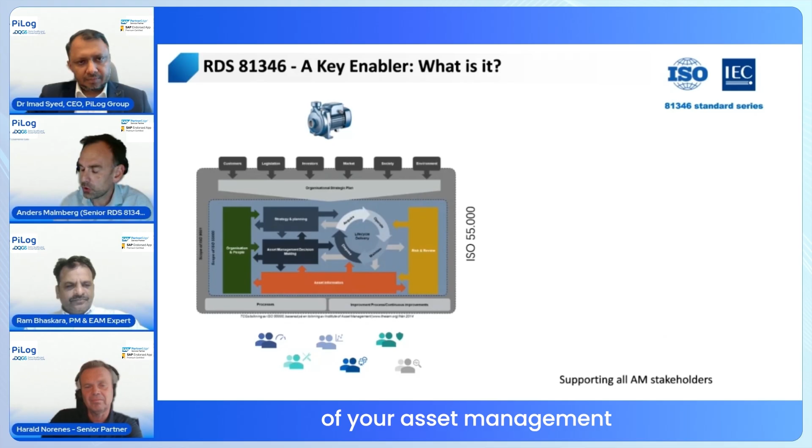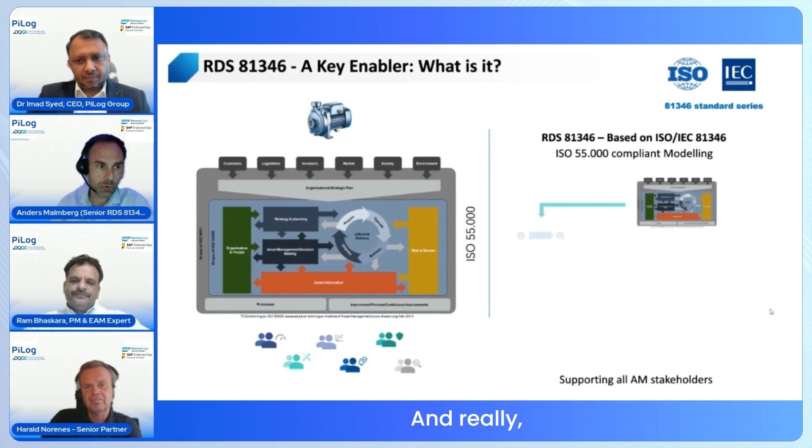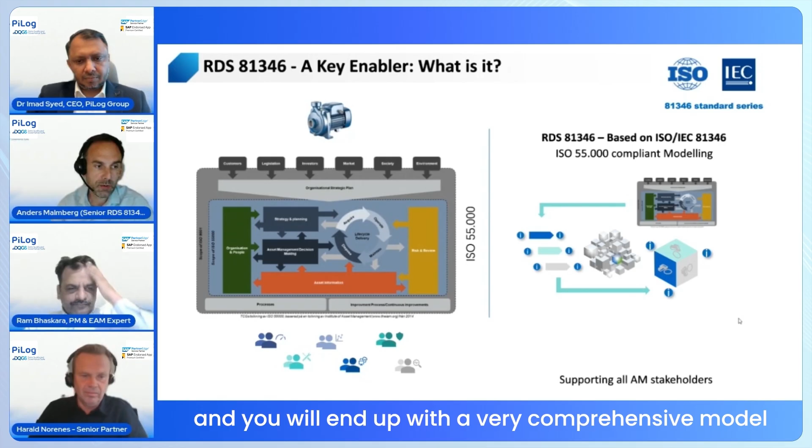So the way it works is you will need to understand the stakeholders of your asset management and provide to them the right kind of organization of your data and information so that they can use it. Really, who are they? What do they want? What do they need? Well, you simply model your asset information according to those stakeholders and their needs, and you will end up with a very comprehensive model that actually caters to all needs for all asset management stakeholders.

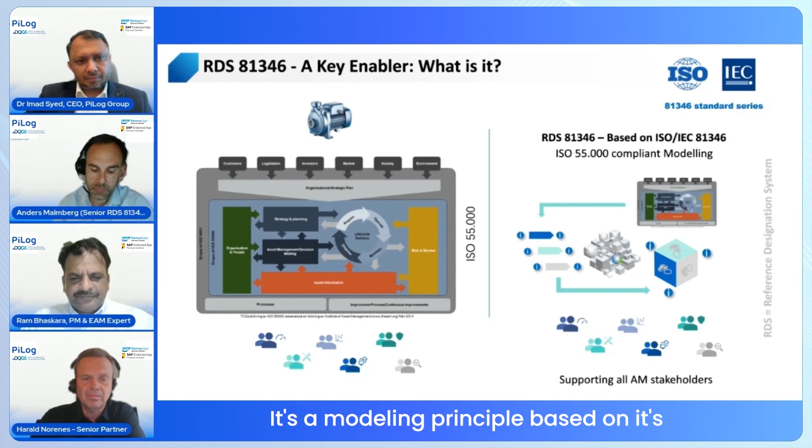So the ISO 81346 series standard explains how to build modeling, and the name of that modeling is RDS. Thus, RDS 81346. It's a modeling principle based on this international standard series.

So if you can also give a little bit of background on how far this has been developed, and is it ready to be adopted and used?

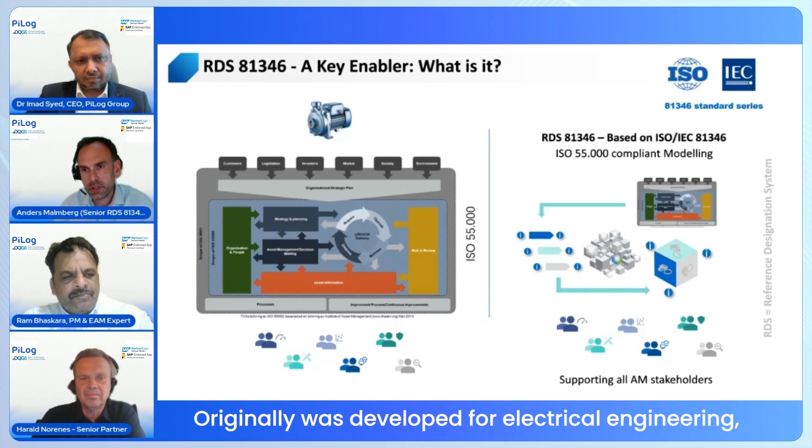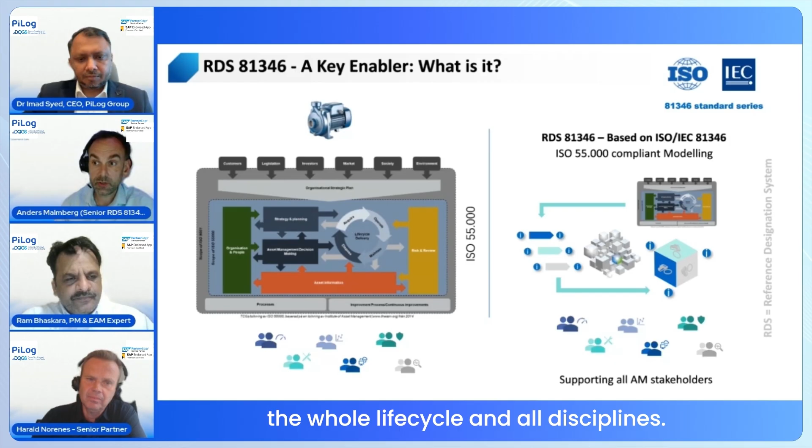Sure. So it dates back to the 70s. Originally it was developed for electrical engineering and has been used since then. But then for the last two decades or a bit more, it's been adopted to other industries, or other disciplines rather. It's one of the most well maintained and developed standards that I know of. Very, very active maintenance teams work to cater to all the needs and develop the standard in a way that makes it more useful. So now it supports all assets, the whole life cycle, and all disciplines. It's very, very powerful.

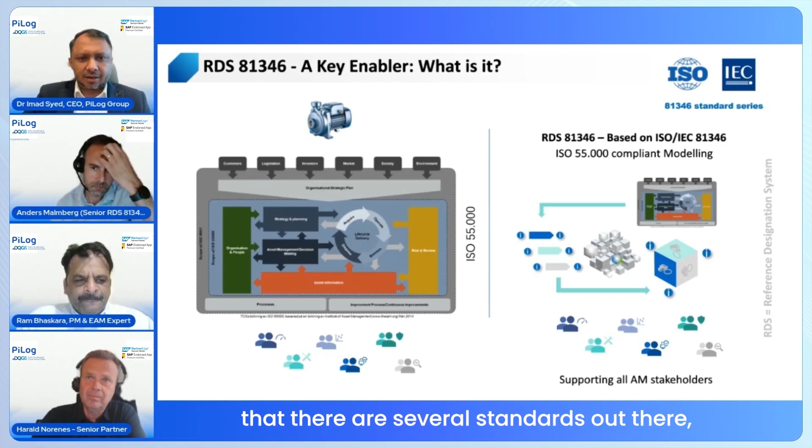Okay, that's good to know. And if I may also ask, there are several standards out there that are relevant to asset management. What is the differentiator here? What are the key enablers, as well as what are those values? If you can kindly deep dive into that.

Yeah, so while, for instance, ISO 14224, which is well known within the SAP PM kind of scenarios and ECC scenarios and so on, is actually developed for maintenance, for managing maintenance, this 81346 series, on the other hand, is developed from the start to actually cater to managing information, right? So the context for this information management and organization is not really specific, for instance, to maintenance.

Rather, it's specific to asset information throughout the life cycle, thus all asset management practices. And really, the difference, for instance, between 14224 and 81346 would be that 81346 is more asset management process agnostic, leaving you with broader support. So when you want to implement, for instance, asset performance management and those kinds of value streams, you need something that is a bit broader and that can cover more perspectives at once.

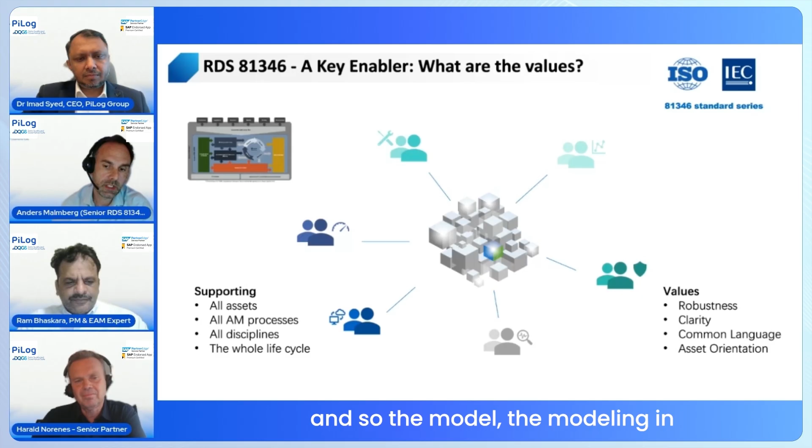And so the modeling in 81346 is based on allowing a variety of stakeholders to see their assets from their side, from their perspective. So it makes the standard very relevant to a lot of stakeholders, and that's really one of the values, also the versatility. It gives you this common language where you can use this same standard for all disciplines, all assets, the whole life cycle, and really cover all the asset management processes. So in that sense, it's quite unique, actually, but also very robust.

Thanks, Anders. Because this is just the introduction of it. Probably at a higher level, what you explained is good enough now. But once we deep dive into it, and once we start understanding the different models and different aspects of it, probably we'll go further.

Anders, you have been an RDS 81346 practitioner. Harald also has been a practitioner of RDS 81346. But we also have Ram, who has been a practitioner of 14224. So if I may ask, both of you, how does the modeling of RDS 81346 differ from 14224? Anders, maybe you can go on to the modeling of it, and then we'll ask Ram the same question.

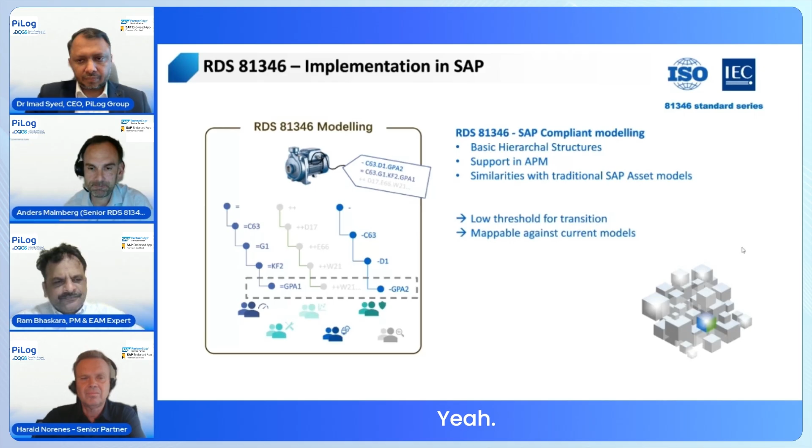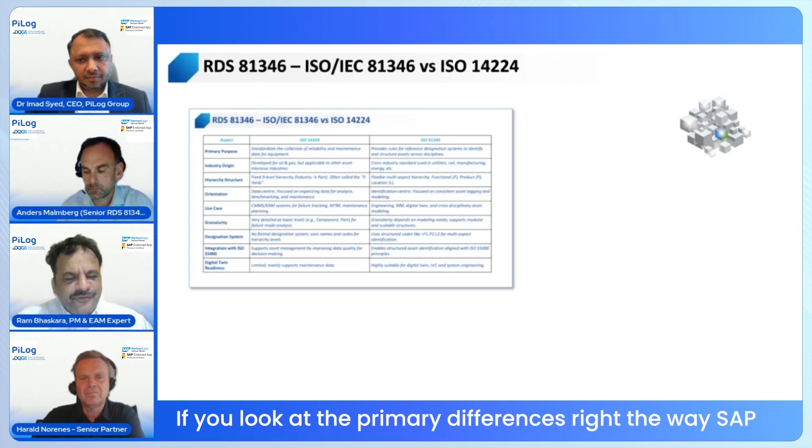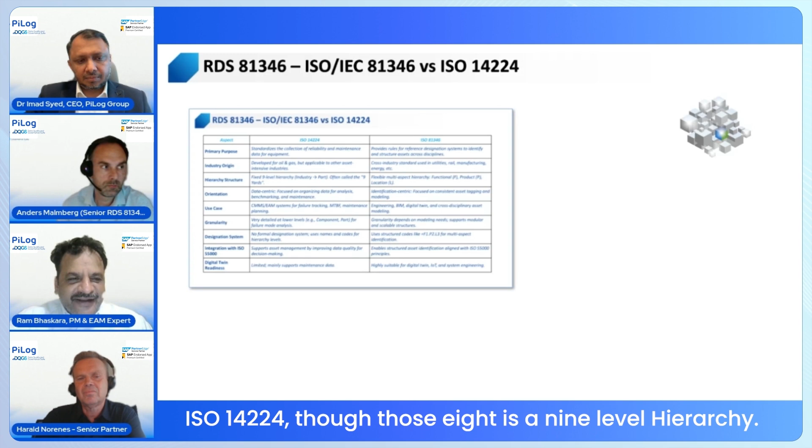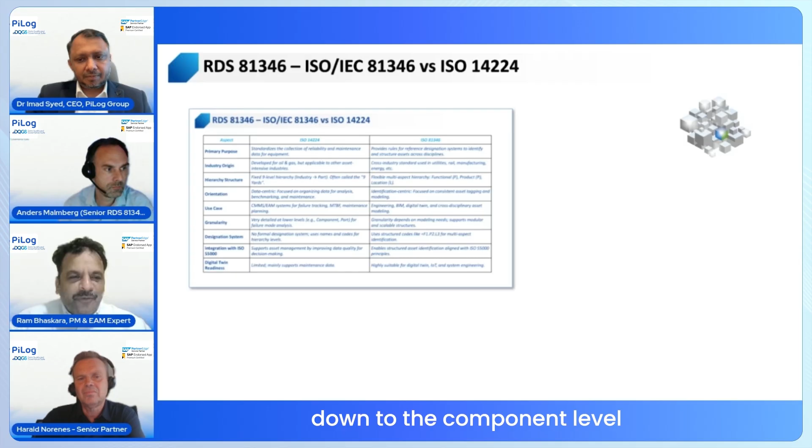Absolutely. So thanks, Anders, for the briefing on 81346. If you look at the primary differences, the way SAP or any institution implementing an EAM solution looks at ISO 14224, though it is a 9-level hierarchy, they start at the equipment level and then try to build all the series or all the data elements below that. If you're looking at assembly, subassembly, and try to break it down to the component level, they focus on the assembly, subassembly, the components, and go down.

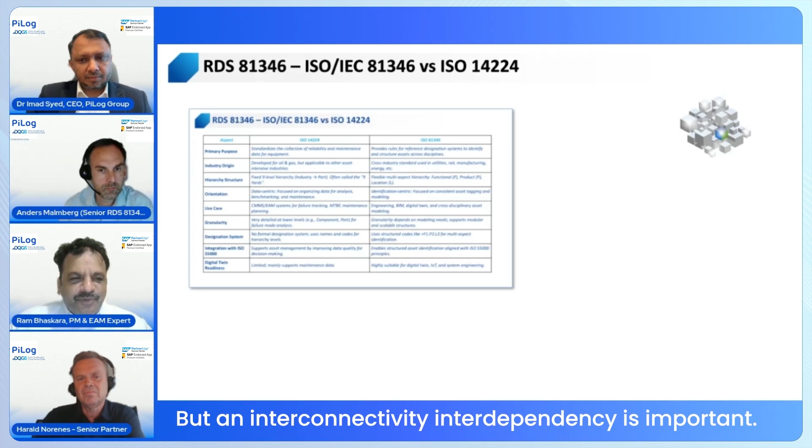But the broader picture, which is typically left out in an EAM solution, is required predominantly when you look at asset performance, because asset performance is a much broader concept, wherein interconnectivity and interdependency are important. So the product, function, and location aspects, which RDS brings in as an additional flavor, become very centric to doing the performance of an asset in terms of its operability, in terms of its function, rather than just a product. That is the flavor which RDS brings in.

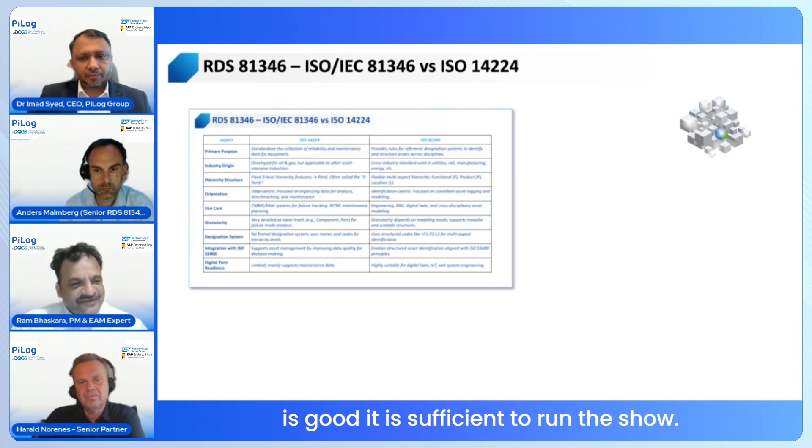And that's why the coexistence of both standards works - one fitting the requirements of work order management and scheduling in EAM, for say an S4 HANA or ECC perspective, is good and sufficient to run the show. But having said that, when you go to APM, when you try to do advanced reengineering processes, or look at the effectiveness of an asset, reliability of an asset, and the longevity of an asset, 81346 gives a broader picture.

So this is a foundation to start with. We can have detailed discussions at probably later sessions. Thanks.

There's a very interesting question from Ejemezu. Is ISO 81346 a replacement for 14224 since the former covers a broader scope? Anders, you can answer that.

So yeah, no, it's absolutely not a replacement, and there are many things in 14224 that are not covered in 81346. For instance, maintenance practices and maintenance strategies and so on. So that's absolutely not covered in 81346. Let me be very clear on that.

Also, 81346 sure has a broader scope, but it's also mainly a different scope. So they're very complementary, but not replacing one another. So the bottom line is both need to coexist. One is from a plant maintenance perspective, equipment efficiency perspective. The other one is from the asset performance management perspective, right?

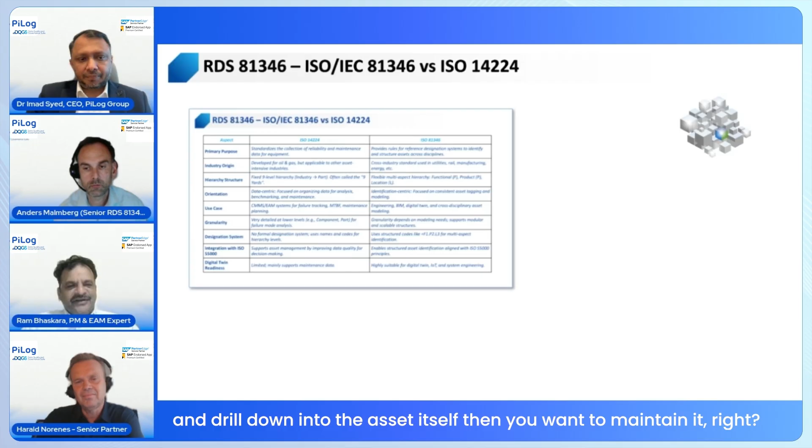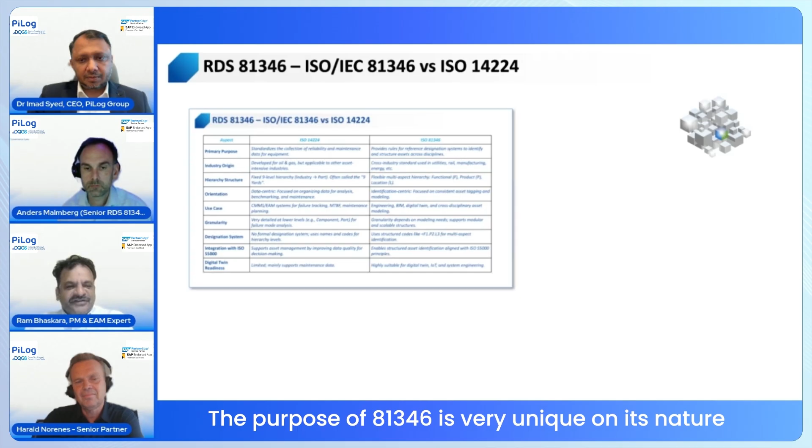Just to give one more flavor to it, Anders, is only from the perspective - as you said - you don't build the task lists in 81346, or you don't get into the reliability engineering modeling referring to ISO 45,000 or 55,000 series and drill down into the asset itself when you want to maintain it. So that is what ISO 14224 gives, in a flavor with other practices of ISO 45,000, 55,000. The purpose of 81346 is very unique in its nature, which we will drill down into. I think, as you rightly said, they have to coexist, right?

Absolutely, absolutely. There's also another interesting question: is there any alignment to CFIHOS standards when it comes to 81346?

So the short answer is yes, in the sense that they're discussed in the same room. 81346 is also a standard series that's part of a broader family for information management. There are a lot more standards that are 81346 compliant or from the same family, where 15926 is also one of them, very tightly tied to CFIHOS. There are connection points and compatibilities, but they're really not playing on the same field, not the same sport.

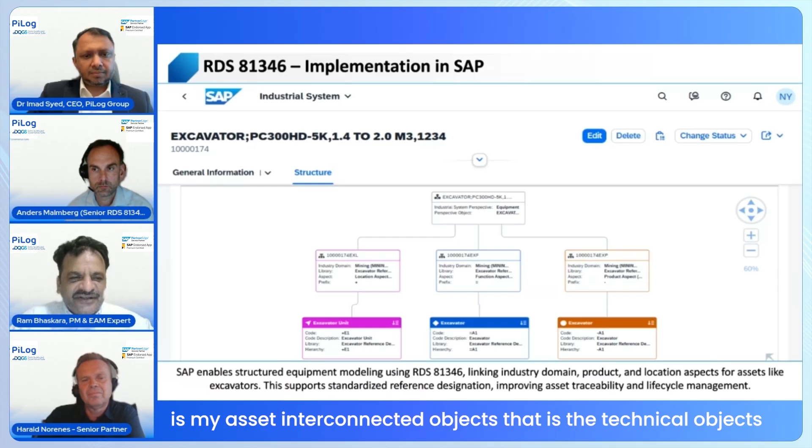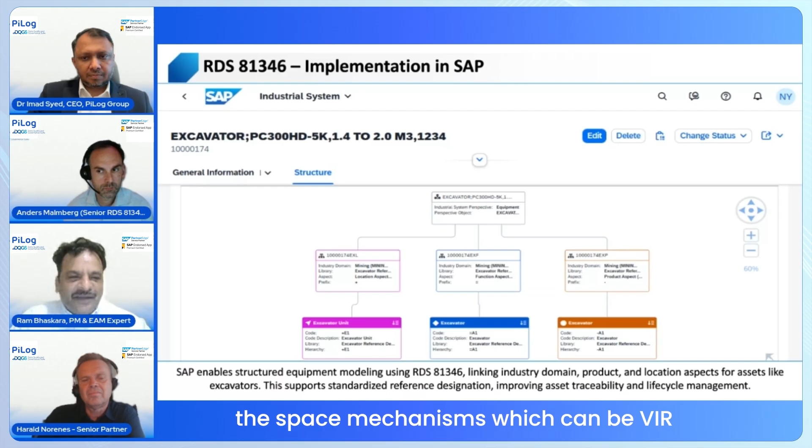I second the thoughts from Anders on this, because this entire process modeling—when you actually take an asset and try to look at it from the reliability perspective, you ask how reliable is my asset, interconnected objects, that is the technical objects, and then translate it to the studies required for reliability. Right from root cause analysis, function point analysis, and take it forward into failure mode, and then talk about risk-based mechanisms, which can be RBI, RIS, or any other studies, wherein we are setting a base for the organizations with this model to be reliability centered maintenance. So that's the whole framework getting built when you look at the organization from the standards.

By the way, this screenshot is from SAP's APM system, so the courtesy is SAP. It's directly created out of the solution that PiLog has built on RDS. Now, moving on.

If this is so good and all of those things, how do we deploy it? How do we implement it, and what are the deployment strategies for that? Let me just give you a bit of lead on that—can this be deployed quickly, Anders? Well, the short answer to that is actually yes. Might surprise you, but this is surprisingly easy.

The reason for that is you will keep your assets. Let's start from the principle that we have a current setup, right? So you would like to convert or expand your current setup to also support APM and 81346—then it's possible. You will actually start from what you have and expand from that, and you can expand at the pace that suits you. That's very powerful because you won't lose any history or data of any sort. You can maintain your current operation, but add new capability to it. So the short answer is yes. It's very easy.

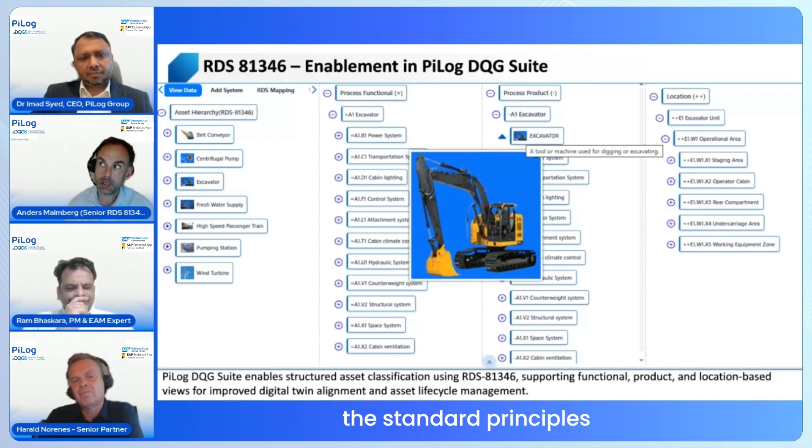So what exactly is this whole Smart RDS? Does it come with any validations, or how is it building the structures, Anders? Well, it's a combination of following the standard principles for breakdowns and reference libraries that look up designations, and then you also have validation in the sense that you get feedback on whether you're modeling in the right way or not.

So with the application support, it gives you a very powerful tool to get to know this. What it might seem like when you look at the picture might seem very complicated - well, it's not, mainly because you will also only work within the structures that you're interested in.

Because from your field of work, you're more interested in the functional parts or the product parts or the location parts and so on. So it's a very powerful tool for developing or modeling the assets and developing the models.

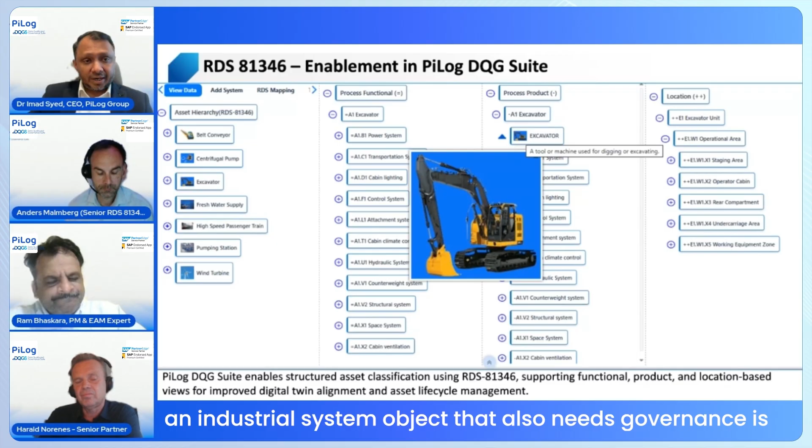So in summary, what we are saying is that there is a solution that has got smartness in terms of business validations, structure development, and hierarchical linkages and relationships. All those things are embedded, and it also has governance, master data governance, because this is an industrial system object that needs governance throughout its life cycle.

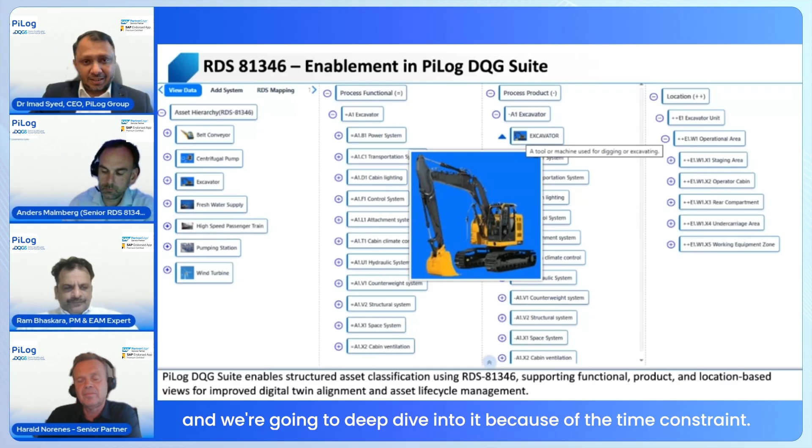And again, I would like to emphasize to all the audience that this is the first series of the webinar, and we're going to dive into it further. Because of time constraints, we have to stop here, but we will definitely come back with a lot more on RDS 81346.

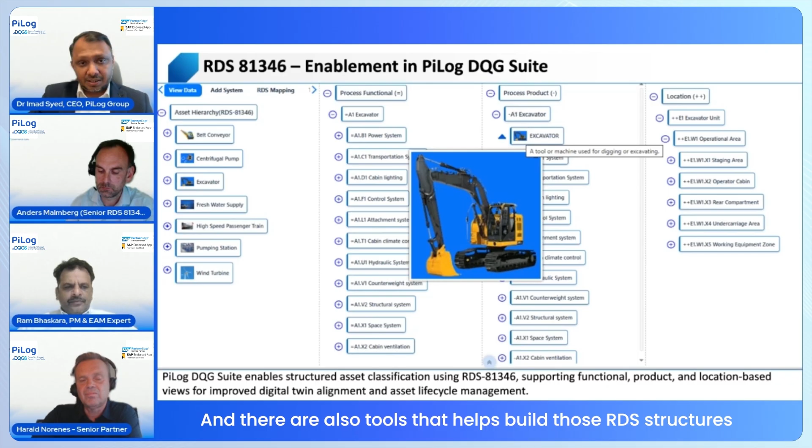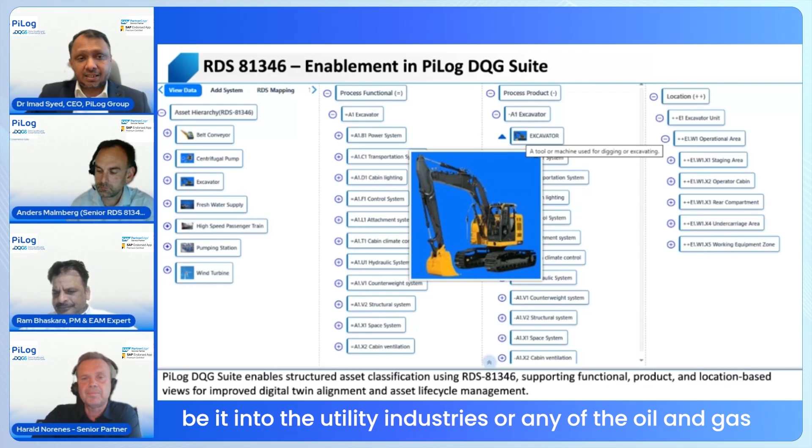So in summary, what we learned is that there's a very good standard that is in practice, not just theoretically - it is in practice. And there are also tools that help build those RDS structures for the assets, the complex assets, simple assets, be it in the utility industries or oil and gas industries or any asset-centric industries. This is also fully integrated with SAP solutions such as S4 HANA as well as SAP APM.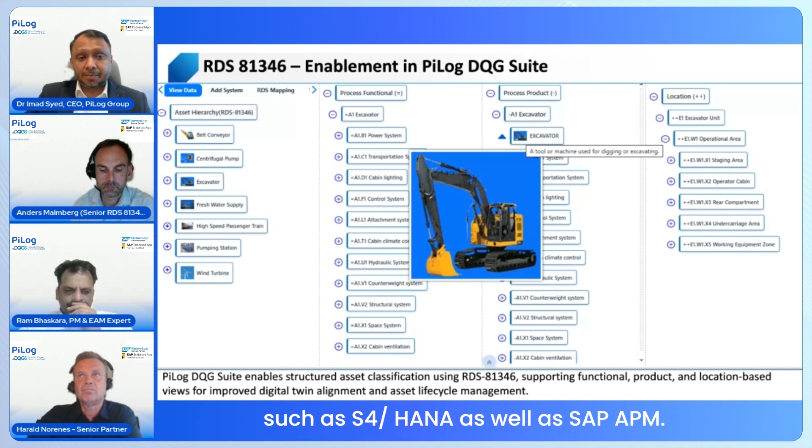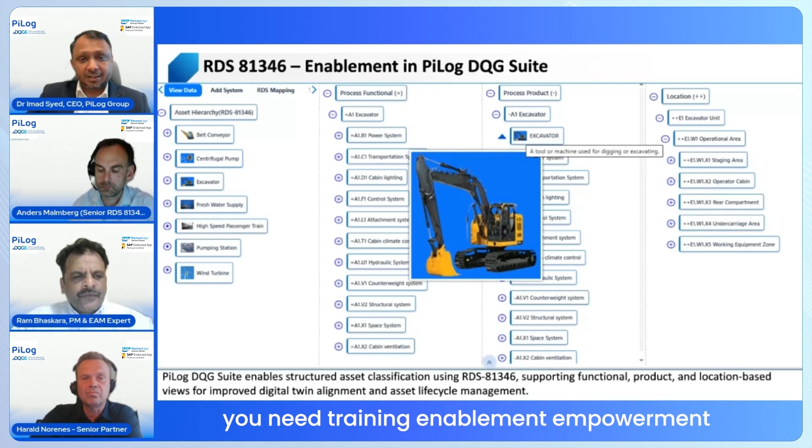In summary, in short, we need 14224 as well as RDS 81346. And if you have any challenges understanding RDS 81346 or implementing it, and if you have a requirement where you need training, enablement, empowerment, we are here. You can contact us, and we would be able to offer you any help to guide you towards your futuristic roadmap of SAP APM implementation.

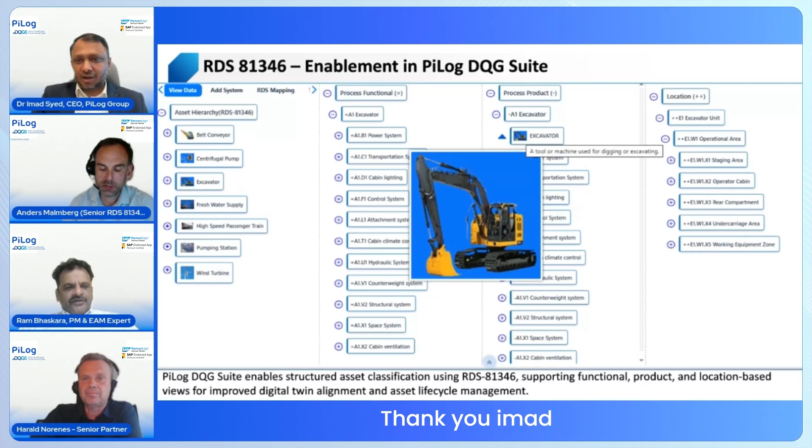Thank you so much, Imad. Thank you. Thank you. Have a great day, have a great day and good luck, everyone. Yeah, good luck. And we are there, don't worry about it. Thank you. Thank you.